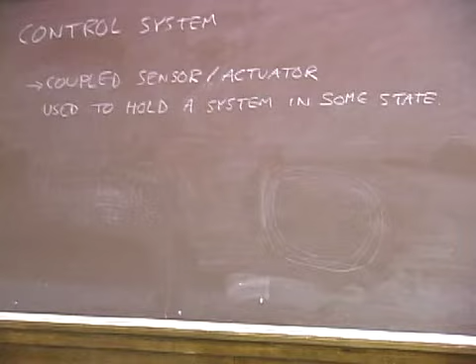And what this sensor and the actuator does is it provides a restoring force. So you specify a state that whatever system you're talking about should be in, and the sensor and the actuator provide a restoring force that holds the system around that state. And some examples of this thing, well, obviously are interferometric gravitational wave detectors. I'm going to use IFO for interferometer. It's just a shortcut.

And some more pedestrian examples are the cruise control in your car, and the thermostat in your home. So these things are all around us. We use them all the time. And I'm going to talk about, well, let me talk about the thermostat. Let's start simple before we move up to something a little more subtle.

When you regulate the temperature in your home, in your apartment, or your house, wherever you live, you don't sit down and estimate what temperature you want in the home, then calculate the amount of heat you have to dump into your home based on the thermal transport through the walls, convection, the leaky window, whatever like that. That's complicated. You don't want to have to go through all that math.

You go over to your thermostat on the wall and you set it. You say, I want it to be 78 degrees in here. And that system knows how to make it 78 degrees in your home, hopefully if it works. And it doesn't calculate thermal transport either. It's not any smarter than you are in that respect. But it manages to maintain the system at 78 degrees anyway. And to me, this is almost like magic.

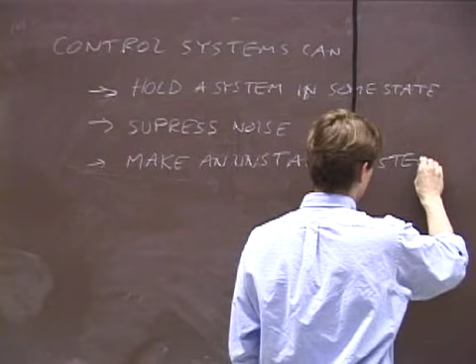Now, it can make an unstable system stable, but as a corollary, it can also, if you're not careful, make a stable system unstable. And we'll talk about that here in a moment. But let me illustrate the first point, how you can hold a system in some predetermined state. And I'm going to introduce you to block diagrams. We use this all the time in control theory.

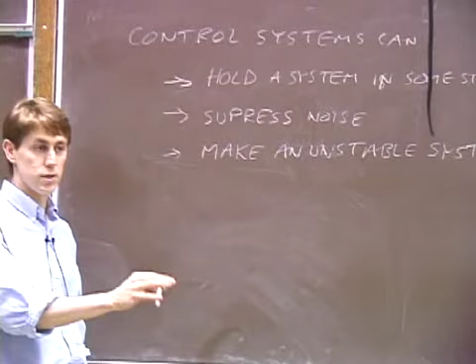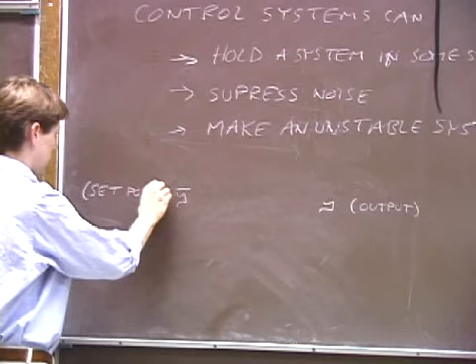Let's say we have some variable y that we wish to measure. This is what we measure. This is the output of our system. And let's say that we have some desired output of the system, y bar. And this desired output we call the set point. For our thermostat, this might be the temperature we want, and this would be the temperature we have. For our gravitational wave detector, this might be the dark fringe, and this might be whatever state the interferometer winds up in.

So what we'd like to do is compare these two values. The first thing we have to do is couple the output to what we want by taking the difference. And when I draw these signal paths, I mean just take the number that this represents and do something to it. And this little circle means make a sum. It's a summing junction. And so this guy should have a positive sign, this guy should have a minus sign. So whatever comes out of the summing junction should be the difference between y bar and y. And this is called the error signal.

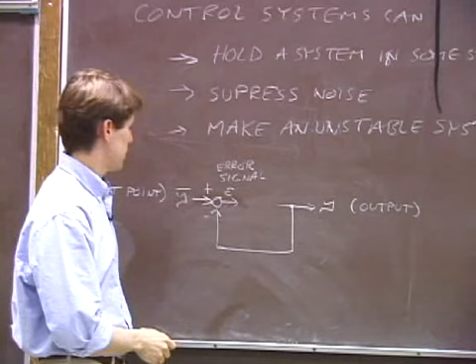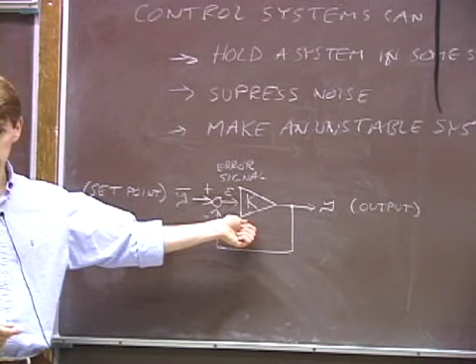So the error signal comes out, and we'll send it through an amplifier. And in this case, this triangle, which means something electrically, we're just going to use it to say multiply the error signal by some number k. So we can write the system. We can say E is equal to y bar minus y, the set point minus the actual state of the system. And then we can say that y is equal to k E, gain times the error signal.

And we combine these two to get y is equal to, well, I can go ahead and do the math, but I'm not going to do it on the board. Is equal to k over 1 plus k y bar. And if k is much greater than 1, that implies that y is approximately y bar. So for a very large gain in this amplifier, the output essentially follows the input.

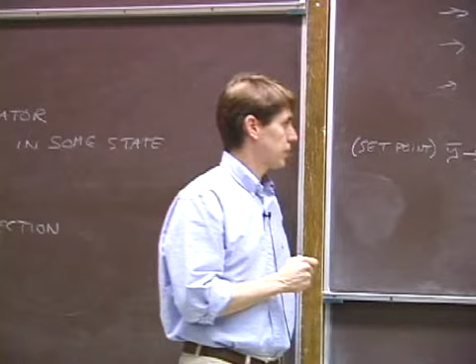Okay, that's simple, and you know your thermostat works in your home. So you might be tempted to conclude that this is a very easy thing to do and we should just implement some for gravitational wave detectors. But this is a very simple system. It doesn't tell you the whole story. In real life, we're going to have deviations from this simple system. Otherwise, I wouldn't be giving you a lecture about control theory. What I'd like to do now is modify this very basic control system a little bit and show you what can happen. So we'll keep this in mind.

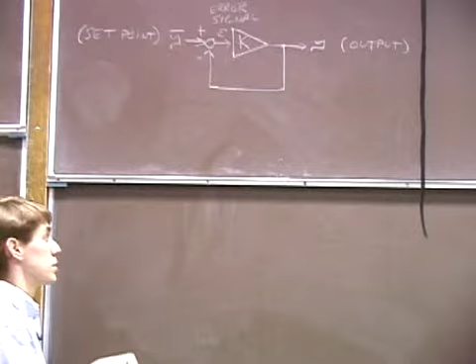So this is a purely mathematical thing here. These are just numbers, and we're assuming instantaneous communication between all of the components in the control system. So let's make this a little more physically reasonable and introduce a time lag. Same system. We have a set point. We have a summing junction. But now we have a delay by some finite amount of time, tau.

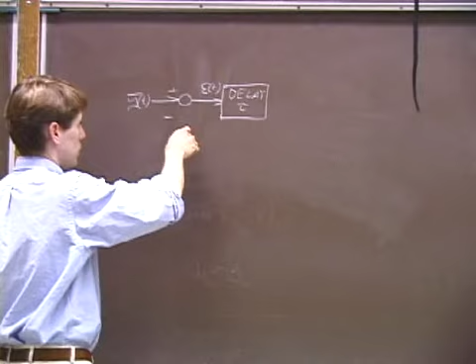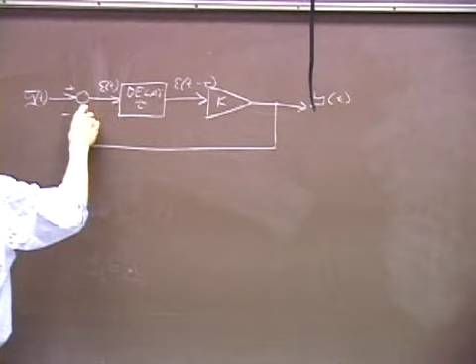And so now everything depends on time. So this is the set point, which might be a function of time. You might go and dial the dial that says where you want the system to go. The error signal will be a function of time. The output of the delay is just the error signal tau seconds before. So the error signal comes in here. Maybe this is a length of cable. That's all you need to make a delay. And then after the delay, it goes into the amplifier. Becomes the output as a function of time. And we route things around here so that we can close the loop and make a feedback system.

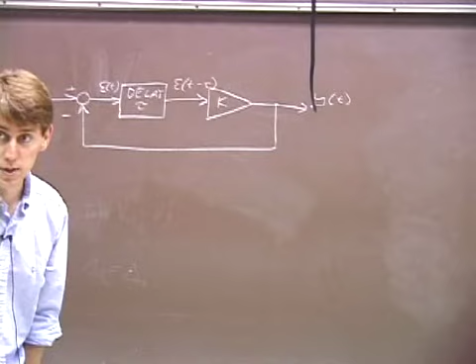Well, let's take a moment to analyze this system. We can actually solve for the dynamic behavior of the system right here. It only takes a couple of minutes. We can do it numerically, but we don't need to use a computer. We can do this on the board numerically. So let's assume that at t less than 0, both the set point and the output are 0. So the system starts out with no input and no output. And now let's assume at time t equals 0, the set point becomes 1. So we can draw the set point here.

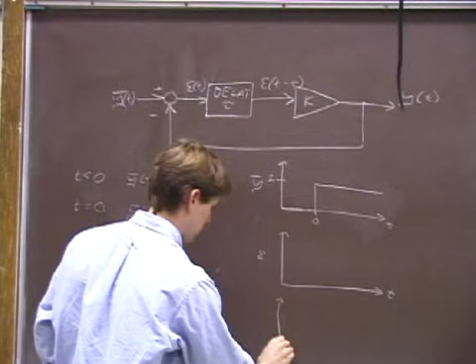So it's nothing. Somebody comes along, flips a switch, and says, turn this on, and go up to a value of 1. 1 whatever. Well, see, this would be the error signal. And this would be y of t. We can construct a table.

Now I'm going to have to look at this to make sure I don't mess up. So if we construct a table here, time, output, from 0 to tau in the first time interval, nothing has happened. The change in the set point has not had time to propagate through the system and show up in the output. So the output is 0. During the next time interval, tau to 2 tau, let's see, where did I write down? Oh, I didn't write down the output equation yet.

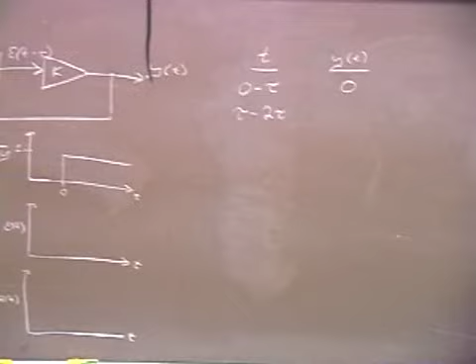So just like we did up here, we can write down y as a function of everything else. So here, E of t is equal to y bar of t minus y of t. And then out of the delay comes E of t minus tau. And then y of t is equal to k times, I'm going to go ahead and solve the equation here, y bar of t minus tau minus y of t minus tau.

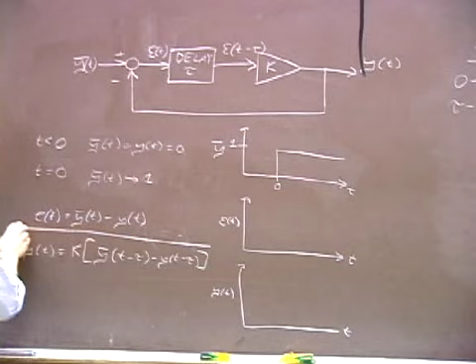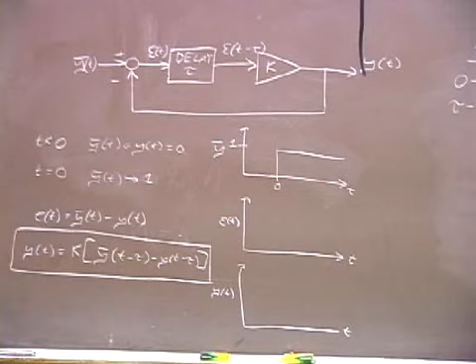So this is the solution to the behavior of this control system as a function of time. And all we need to do is set some initial conditions with y bar and y, and we can propagate this forward. And that's exactly what I'm going to do with this table here. So from 0 to tau, there's no input, there's no output because the input hasn't had time to propagate through yet. From tau to 2 tau, well, y bar is 1 because time is after the first time interval. Y was 0 for the last time interval. So during the second time interval, this is just k times 1 minus 0.

And we can keep doing this, just reading off this as a function of the values that came before it. And we get, and I want to make sure I don't make another mistake here, k times, oops, yes, that's 0, k times 1 minus k, and so on and so forth. And we can, for a general time interval, n tau to n plus 1 tau, write a series solution for this.

And the series solution for it is very straightforward, and we can see it from the pattern as we build up to it. It's k, the gain of the amplifier, times the sum from little n is equal to 0 up to n minus 1 of minus k to the n. And you can work this out in your leisure. It's not too hard to figure out.

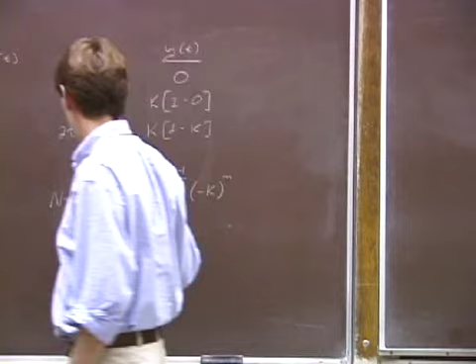So if we solve for this, now what happens if we go back and graph it? Well, if k is 1/2, then this is not too hard to do. It goes up to 1/2 during the first time interval. And then it goes up to 1/2 times 1/2, which is a fourth, and it comes down to here, and it'll eventually converge in to a value that's given, or sorry, this is y, to a value that's given by this sum in the limit as n goes to infinity.

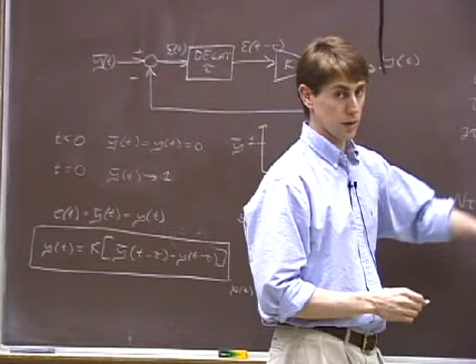But this sum, most of you will have seen this sum before, and you'll recognize that it converges when? Anybody know? What's the condition for convergence of the sum? K is less than 1. So this thing diverges if k is greater than 1. And this is a problem for us because we decided up here that k should be much larger than 1 so that the output would accurately track the input.

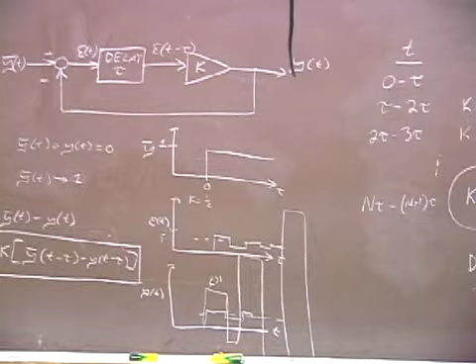But we see the introduction of just a simple time delay, and nowhere in here did I take into account the length of tau. Tau can be arbitrarily short in this simple model. The system will, for k larger than 1, oscillate. So instead of converging, if k is greater than 1, it does this and blows up. So obviously there's a little more going on than we thought, a little more subtle behavior than the simple diagram that we would have thought governed the system.

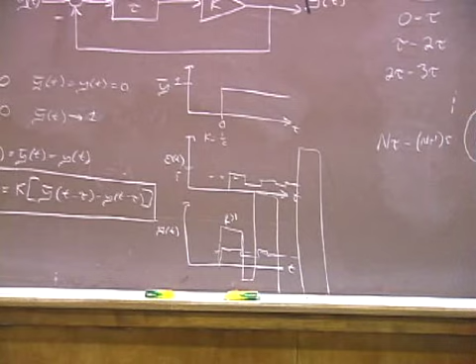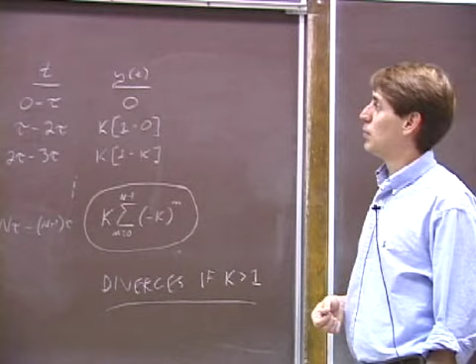So we know how to make this system stable. We can just choose k less than 1 to make this particular system stable. But the next system that comes along is going to have a different dynamic, and we might want to do something different to make it stable.

So what we'd like to do now is to have a general theory of stability for control systems that's applicable to everything from something as common as your thermostat up to anything as interesting and sophisticated as an interferometric gravitational wave control. Erik, can I say something?

That's right. Yeah. I'm assuming that the amplifier is good over all frequencies, which it's not really. But I told you, don't run ahead. I'm getting there. And he's made a point here, and hopefully by the end of the lecture you'll see what point he's made and you'll understand what he means by that.

So let's talk about a general theory for control systems. So before we can talk about a general control theory, we need to generalize a transfer function and find some formalism with which we can deal with a transfer function.

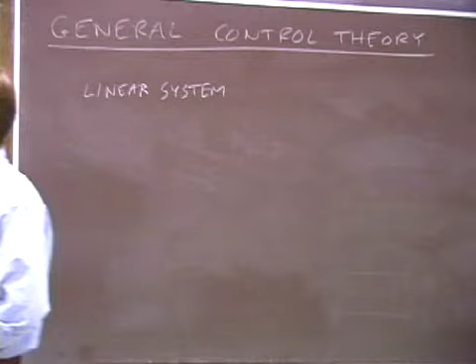So let's consider a linear system, a generalized linear system, and all of these things here are linear systems. This is a linear system, this is a linear system, this is a linear system. So let's consider a generalized linear system. In fact, the only thing we're going to treat right now is linear systems in control theory. So let's consider a general linear system which we'll represent by little h.

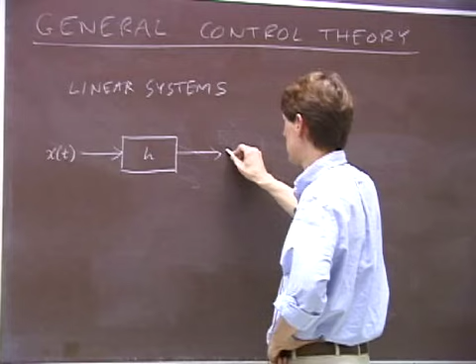And we'll have some input, x, which depends on time, goes into this linear system and produces an output, again, a function of time. And we've seen before in this class that for any linear system, we can write the output, y of t, as an integral expression of the input and the transfer function, or the impulse response, of this linear system.

So, now I haven't been to every lecture this term, so I don't know whether you've made the jump between this and the more generalized, I won't say frequency space, but S-plane. So this is an integral equation. It's very general, and it's nice that this is general, but it doesn't do us much good because it's hard to deal with. It's hard to manipulate an integral equation. So we'd like to transform this into something that's easier to work with.

Now, we as physicists are used to looking at things in the steady state. We're used to saying, oh, well, if this is a steady state solution, it's oscillating at a given frequency, then this will also oscillate at the same frequency, because the system is linear, so we can just Fourier transform it and deal with the Fourier transforms.

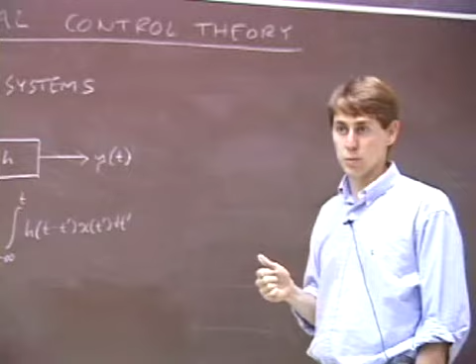But Fourier transforms are only good for steady state behavior. And as we see back here, we're interested in things that are not steady state behavior. This convergence or divergence is not in the steady state, so we need a generalization of the trick of using the Fourier transform that can take into account non-equilibrium behavior, non-steady state behavior. And to do this, we will generalize.

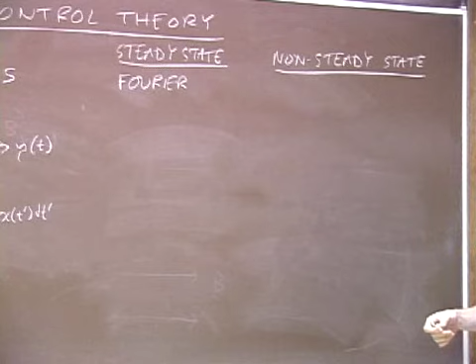So we'll call this steady state behavior. We would use a Fourier transform. For non-steady state behavior, does anyone know what we use, the analog to the Fourier transform in the non-steady state? It's the Laplace transform.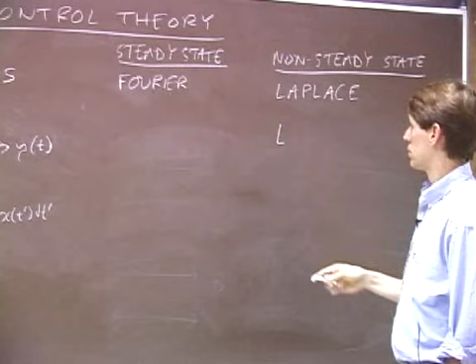And the Laplace transform, so if we want to transform a function, let's say we want to transform y of t, for example, the output of this linear system. The Laplace transform is defined as the integral from 0 to infinity of e to the minus st y of t dt. And we call this capital Y of s, where s is the parameter of the Laplace transform. And you can see how this reduces to the Fourier transform, essentially, close enough.

The Fourier transform goes like the integral of e to the minus i omega t y of t dt. And I'm going to be real sloppy here because I don't want to talk about the differences in the limits of integration or particular signs in the exponents. But if we choose s, which in this parameter might be complex, if we choose s to be i omega, then this just reduces to the Fourier transform.

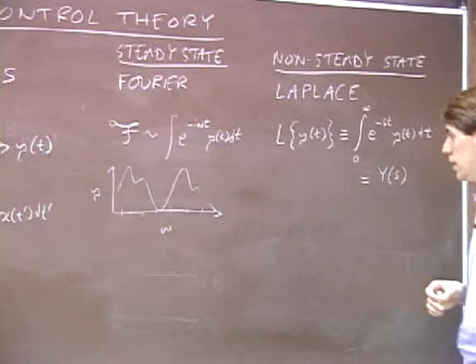So the Fourier transform, we evaluate the behavior of this function y as a function of frequency. So this is a one-dimensional parameter here, and y may have some frequency dependence. Over here, in the Laplace transform, we generalize this one-dimensional parameter omega into a two-dimensional parameter s. And s now we represent in the complex plane.

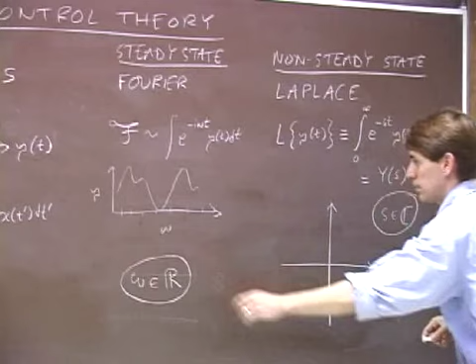And I want to remind you here, omega is real, and here s is complex. And this is the s-plane. s equals i omega along the imaginary axis corresponds to the axis that we treated in the Fourier transform. So this axis just simply occupies this subset of the s-plane.

Now, before we go on, let's talk a little bit about what the s-plane means. Now, actually, before I do that, let me point out that the utility of the Fourier transform was that it obeyed the convolution theorem, that we were able to transform an integral equation into a product of two algebraic expressions. And what I want to stress to you is that the Laplace transform, that is thinking about things in the s-plane, is still very useful because the convolution theorem still holds.

So for Laplace transforms, for this expression, we can write capital Y of s, the Laplace transform of y, is equal to capital H of s times capital X of s, where these are the separate Laplace transforms of the impulse response and the input. So all of the niceness that we got from the Fourier transform still holds for the Laplace transform.

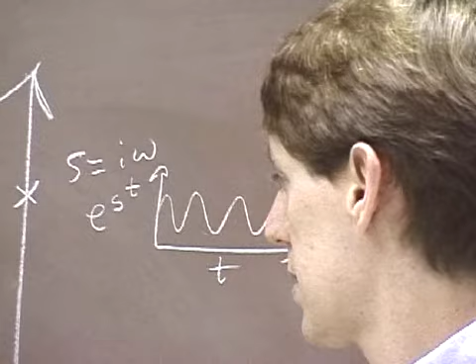So, if we plot the s-plane, and we pick an s on the imaginary axis, s equals i omega, then the physical solution of whatever time series we're Laplace transforming has a behavior where e to the st versus time is steady state oscillatory. On the other hand, if we go down here on the negative real axis, then s is equal to something like minus gamma. Then the physical solution dies away exponentially, like so.

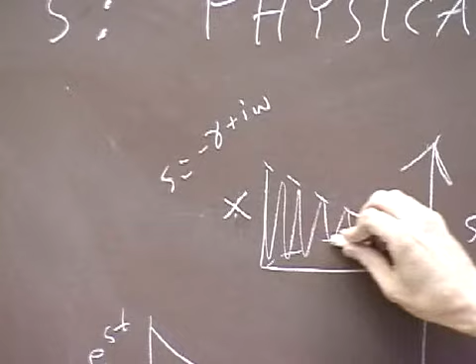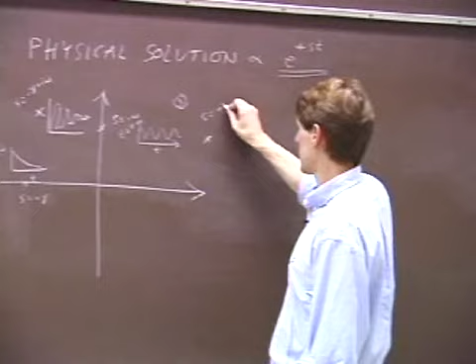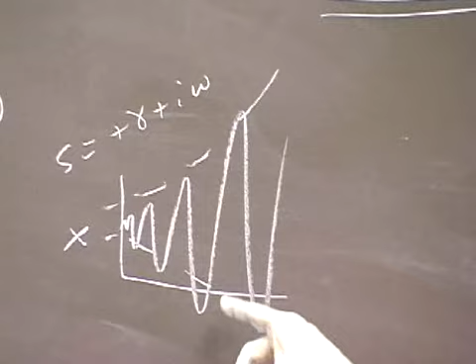And you can go on and pick other combinations. If you pick something in this quadrant, then s equals minus gamma plus i omega, and the physical solution corresponds to a decaying oscillation, oscillating at frequency omega and decaying with an envelope of e to the minus gamma t. Similarly, in the right half plane, where s is equal to plus gamma plus i omega, the physical solution corresponds to an increasing exponential, a divergence. And this is exactly the kind of thing, qualitatively at least, that we talked about over here, where we constructed a simple system that diverged.

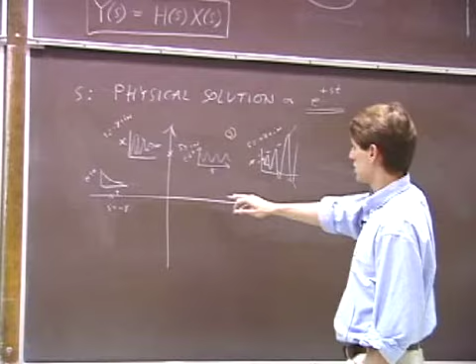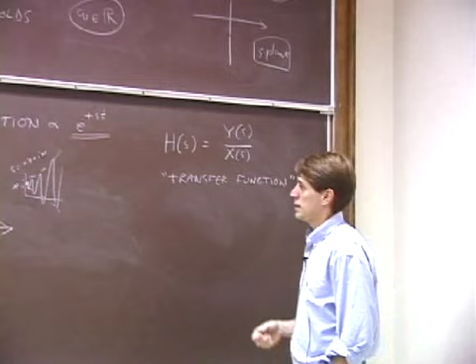And so, if we take a linear system and examine its behavior in the s-plane, this function H, the Laplace transform of the impulse response, can be rewritten as Y, the output of the system, divided by X, the input of the system. And this is known as the transfer function of the linear system. The natural response of this linear system, by natural I mean something that can produce an output in the absence of an input, will be where there are poles in H of s. That is, if X is 0 and Y does not have to be 0, then this thing exhibits a pole.

So I'm going to call the natural response where H of s has a pole. And these poles we're going to number s sub p, and there may be more than one, so we number them with a subscript. So that's the pth pole in H of s.

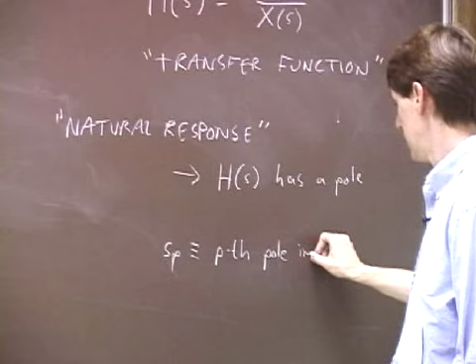So if this system has a pole, for example, here, a damped harmonic oscillator has a pole here, that means that if you kick it and then remove the input, so you set X to be something and then make X 0, then at times after this, the output simply damps away. Same thing we talked about here. If the pole is on the real axis, then it is either critically damped or overdamped, so you get no oscillations, and the system simply damps away. On the imaginary axis, it oscillates, and so on.

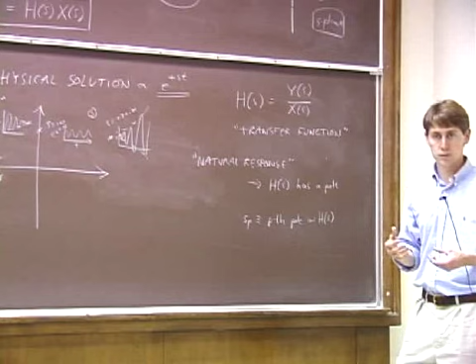What does the case of X equals 0 correspond to? Does the natural response correspond to the output being 0? The input being 0. X is the input. Okay, so I just had the reverse. Right. So this is what the system can do on its own. The input is what you do to the system, the way you stimulate it. The output is what it produces.

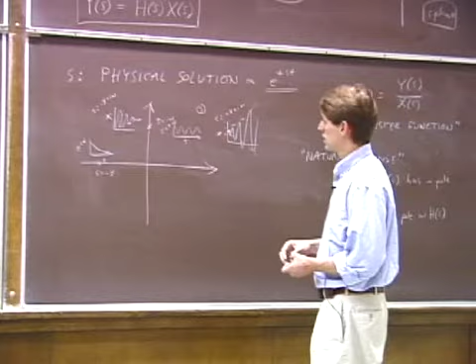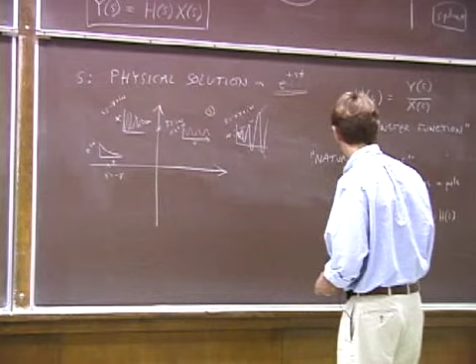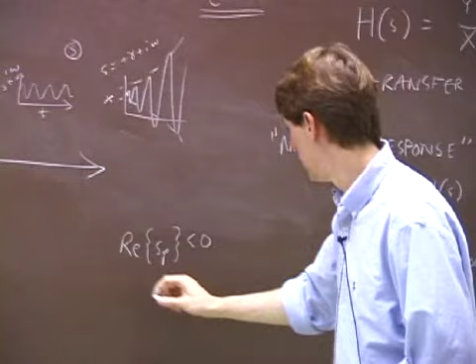Okay, so right away we can say in isolation, this linear system can be considered stable if all of its poles are in the left half of the S-plane. And so if the real part of s_p is less than 0 for all of the poles, then we say the system is stable.

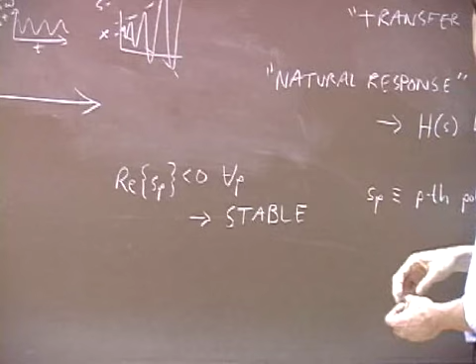Now, why are we concerned with what happens if there's some transient excitation, some transient kick, some transient X that comes along and then goes away? Well, that's because in real life, systems are all the time getting kicked. There's no such thing as a perfectly noiseless input. I mean, even the vacuum has noise to it. There's thermal excitations in electronics, there's quantum excitations, and so on and so forth. So even the slightest little excitation will start natural motion of this linear system.

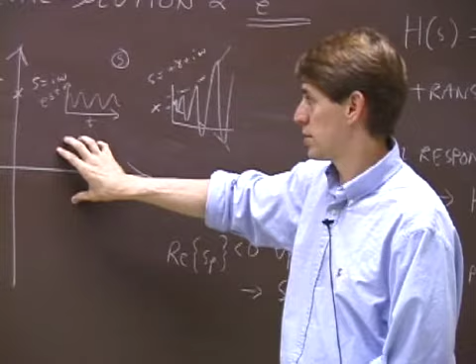And if that natural motion corresponds to a pole that's in the left half plane, then it'll get excited and it'll damp away. Whereas if it corresponds to a pole in the right half plane, it'll get excited and then blow up. So the system can never stay quiet. It'll always diverge in real life.

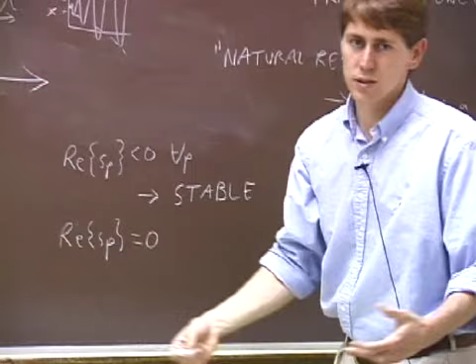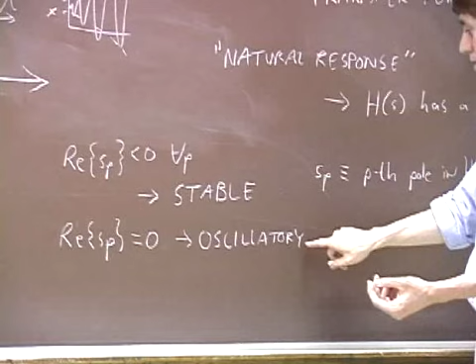Just for completeness, we'll say that if the real part of the pole is equal to 0, then we still kind of call the system stable, but we don't like it. We'll say the system oscillates. And if you've ever built an op-amp oscillator in an undergraduate electronics lab, this is exactly what you've done. You've set up a feedback circuit with the op-amp in such a way that you've tuned the pole to be right on the imaginary axis, and the system oscillates.

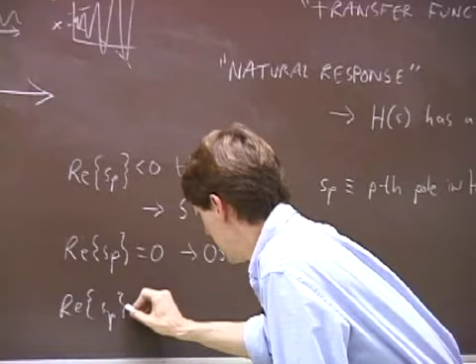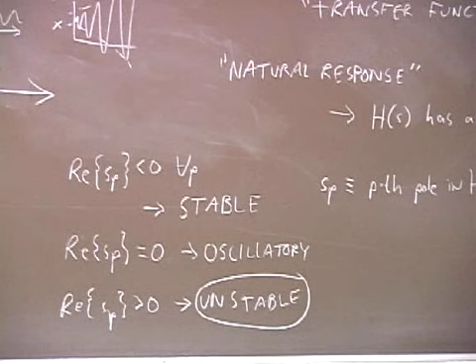If the real part of the pole is positive, then the system is unstable. And that's what we want to avoid in a control system. We want a system that is stable, we can tell it where to go, and it'll stay there. Okay, all of this is very general, and this holds for any linear system. This feedback loop that we've constructed here is a linear system. So let's go back and analyze the feedback loop using the language that we've developed over here with Laplace transforms.

So let's go back and rewrite our control system like this. Now we're going to talk in terms of the S-plane. Oops, that should be Y bar. And again, we'll have a summing junction and an amplifier, K, and an output. Now, K may depend on S as well. K may have some frequency dependence. And we'll turn around and we'll tie the output to the input.

Now, in this case, I'm going to collapse everything into this generic stage. So we might include both a simple multiplication and a delay. We might have some more complicated frequency dependence here. In any case, I'm going to contain whatever's going on in this path between the summing junction and the output into one stage. And in fact, I can contain the summing junction and the feedback path into one stage too. So if I just consider this as one block, which corresponded to our block that was labeled little h there,

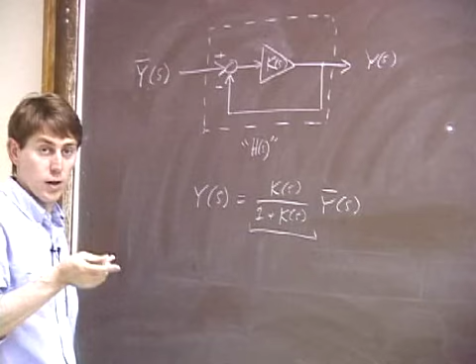H of s, then we can rewrite the transfer function between y bar and y. So Y(s) is equal to K(s) over 1 plus K(s), times Ȳ(s). This is a linear system. This is a transfer function. So we can go back and we can look for the poles of this transfer function in the S-plane and find out whether or not the system is stable, of what we call the closed loop transfer function.

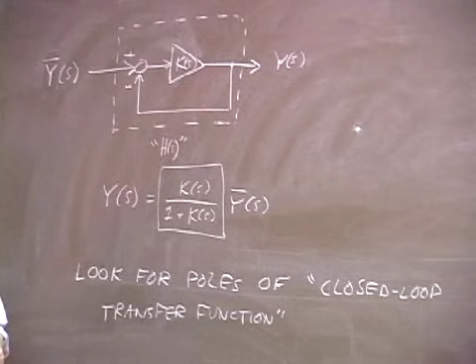Which is this. So can you explain the phrase closed loop? What's the loop? What's the difference between closed and open? So this would be the loop, including... When I ask questions or anyone asks questions, it's been suggested you repeat the question. Oh, sorry. The question is, what is meant by the term closed loop?

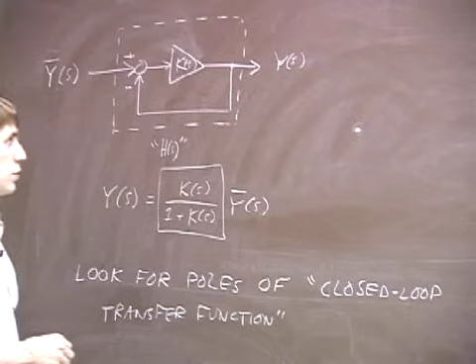What I mean by the term closed loop is this including a feedback loop. So open loop might just be the transfer function of that block without this signal path in place. When I put the signal path in, I close the loop and I turn it into a closed loop system. So let's assume for a moment that I haven't been stupid enough to put a pole in K by itself. Why would I do that if I wanted a stable system? So let's assume K by itself has no poles.

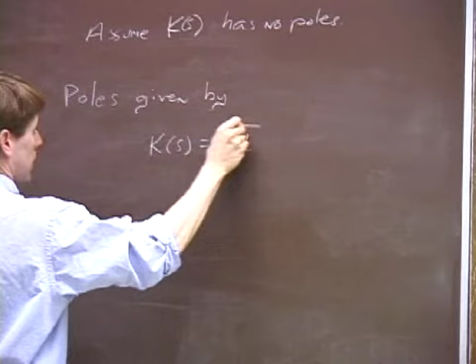Then the poles of the closed loop transfer function will be given by the equation, well, whenever the denominator vanishes, or, K of s is equal to minus 1. So what I would have to do is go in and look at the actual form of K, the physical form of K, and solve this equation to find out what the poles are, and then look to see if they're in the left half or the right half of the complex plane, the S-plane.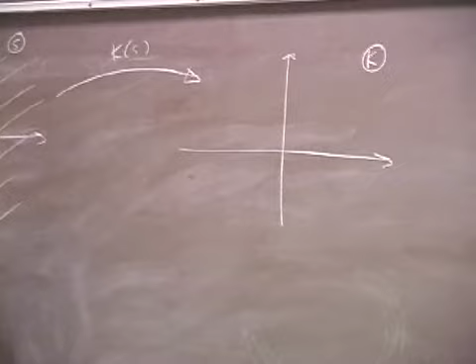We can do a mapping where we map the S-plane onto the K-plane, where K is the open loop transfer function. And we get this simply by feeding this set, the whole right half plane, into the function K and translating it over to a new plane. Some of you have seen conformal mapping. This is very similar to conformal mapping, except that we don't have the restriction that the derivative must be non-zero everywhere. Is that right? You may be able to correct me on that one.

So this region in the S-plane gets turned into some region in the K-plane, and I'm going to draw it. It might look like this. Something like that. And what we look for, in this case, is the point minus 1. K is equal to minus 1, and we make sure that the image of the right half of the S-plane does not include this point, minus 1. And if it does not include minus 1, then none of the poles are in the right half of the S-plane. And this is known as a Nyquist diagram.

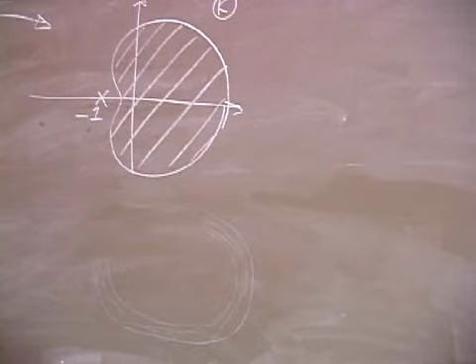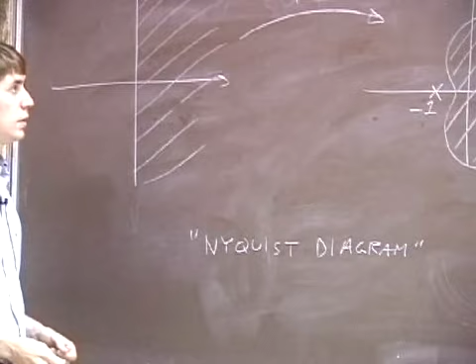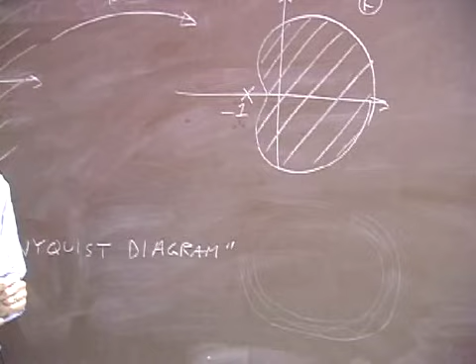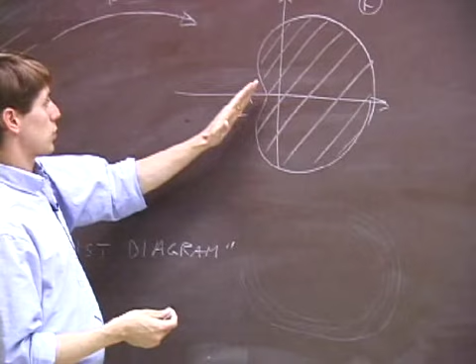And theoretically, all that is necessary is that this map of the right half S-plane not include minus 1. But in real life, we want to give it some wiggle room. We want some buffer around the point minus 1 to make sure that if, for example, this region swells, if the temperature of one of your op amps changes and the gain increases or decreases, this thing won't swell up and swallow the point minus 1. Because if it does, then the system goes unstable and begins to sing.

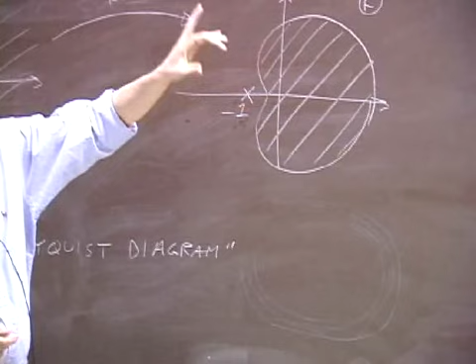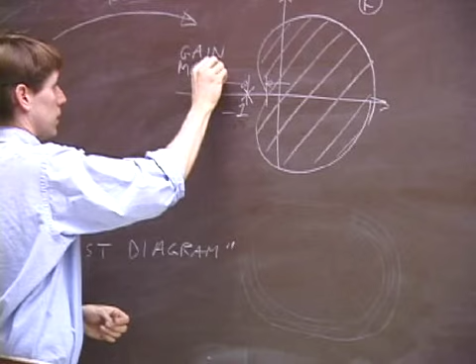We also want to make sure that it doesn't tilt. If we introduce some additional phase lag, say due to a time delay, we want to make sure it doesn't tilt up and enclose the point minus 1. And there's a couple of other terms. This is just vocabulary, but you hear experimentalists talk about this all the time. The gap along the real axis between the boundary of this region and the point minus 1 is known as the gain margin. It's margin because it's a buffer between the forbidden point minus 1 and the region we're looking at. And it's a gain margin because it's how much we can scale the whole thing before the system goes unstable.

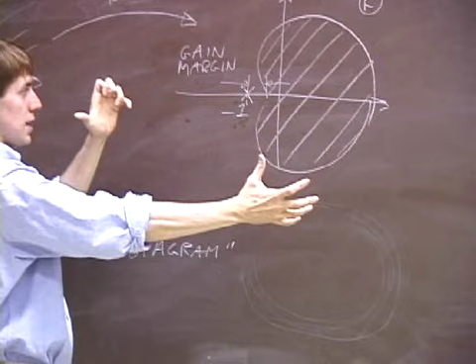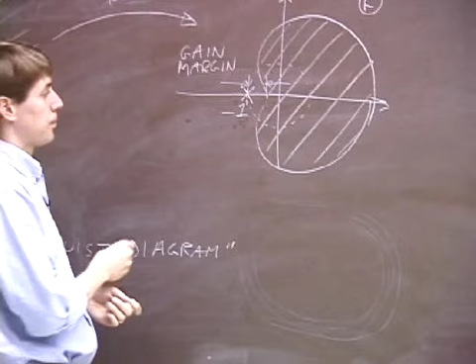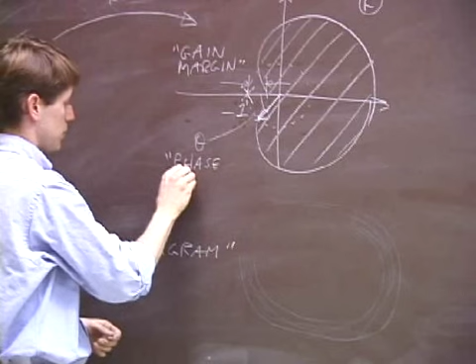Similarly, if we draw a unit circle, and we look at the point where this boundary crosses that unit circle, that is where the magnitude of K is equal to 1, we can look at this angle here. We'll call it theta. Are you using the color chart? Let's just draw it out here. Theta. So gain margin is this gap, and this is called, not surprisingly, phase margin. And that's how much we can tilt our region before the system goes unstable.

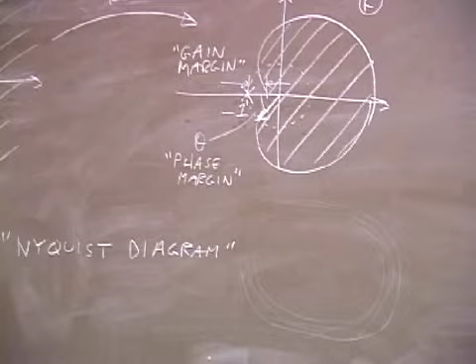So that's a Nyquist diagram. And of course, we would have to know the actual form of K before we could really do this. And you'll draw one of these Nyquist diagrams in the homework set. So we'll see the phase margin one more time. I'm going to draw a close-up of it when I talk about Bode plots, which is now.

Another terminology that you'll see, are we switching? Are you done?